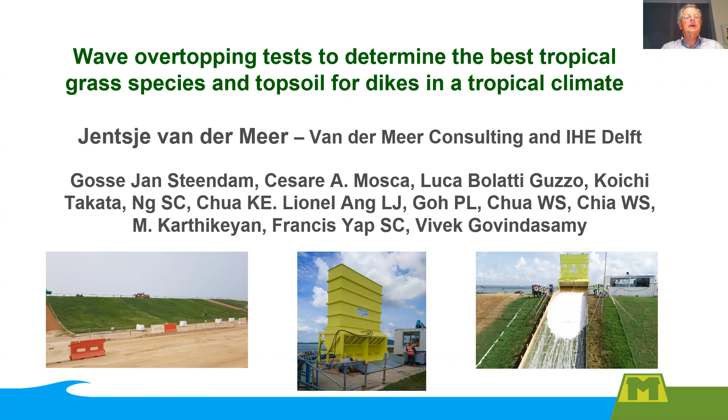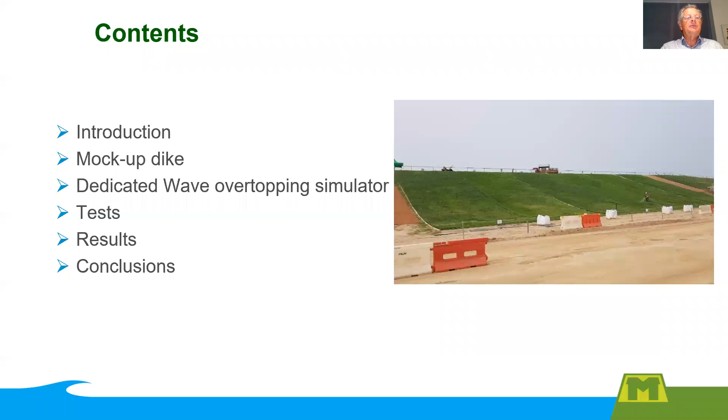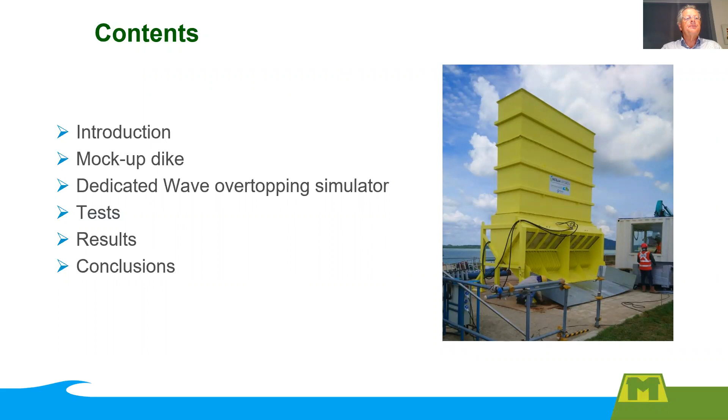I will first introduce the project and why we do the overtopping tests. To carry out the tests, we have made a test dike or mock-up dike. We also designed and constructed a dedicated wave overtopping simulator. I will tell about the tests we did and of course about the results, and finally I will end up with the conclusions.

The project is located in Asia in a tropical area. It is a coastal project where a dike has to protect the area from flooding. The objectives of the project are, firstly, to discover what grass type and topsoil is best as a grass cover on the landward dike slope. From the test results, the best combination will be used in the project for the real dike.

Secondly, we will also test for very large overtopping, really far beyond design conditions, just to see how the grass cover will fail. This is a more scientific aspect, as we don't think those conditions will ever happen in reality. The method to achieve the objectives is quite simple: construct a test dike and a simulator and perform the tests. The realization of this all takes, of course, a significant effort.

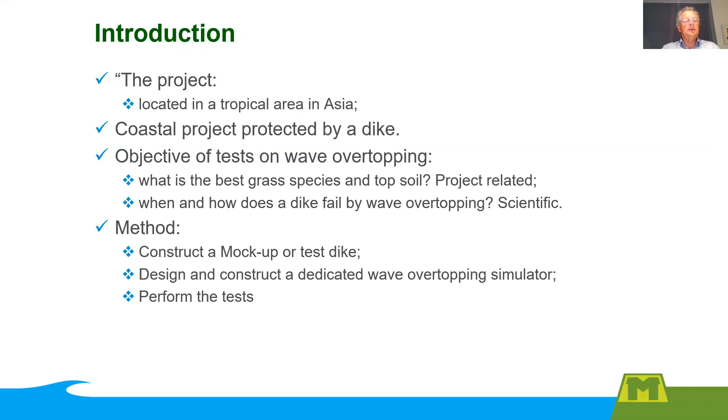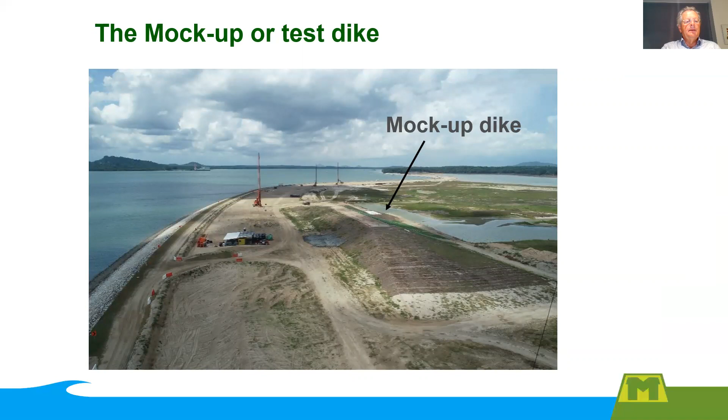Here you see the project site where we have constructed the test dike. The dike will have a landward slope of 1:3 and consists of a sand core covered with 2 layers of clay, a subsoil of 0.4 meters and a topsoil of 0.3 meters, where the grass will be seeded and grow. This landward slope was constructed for the test sections, resulting in a 100 meters long test dike.

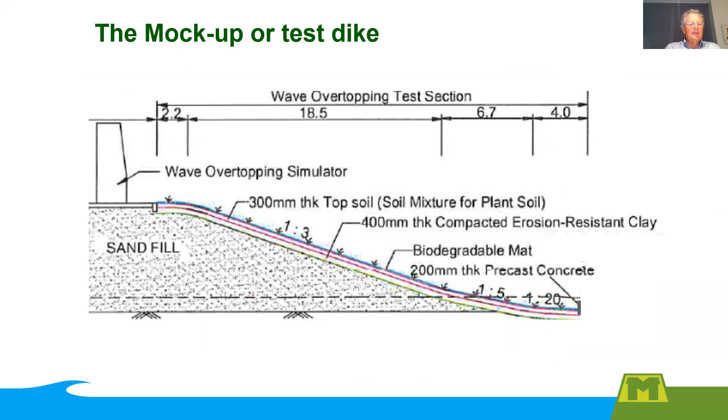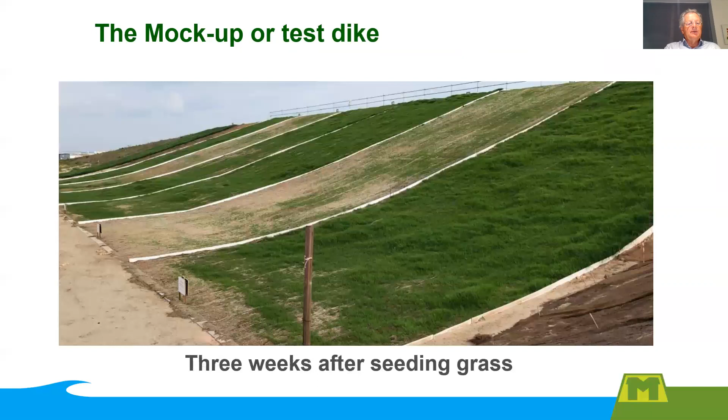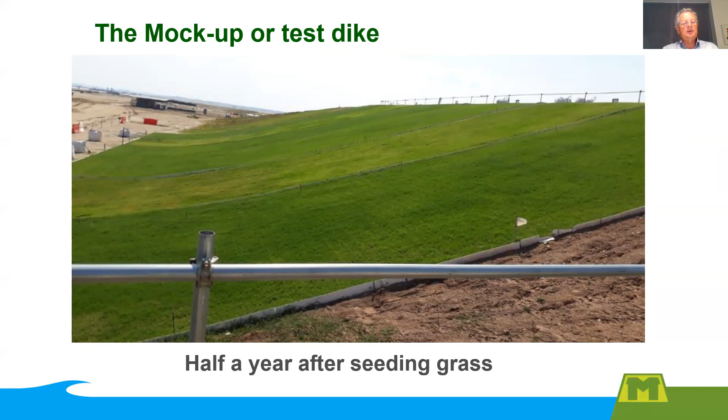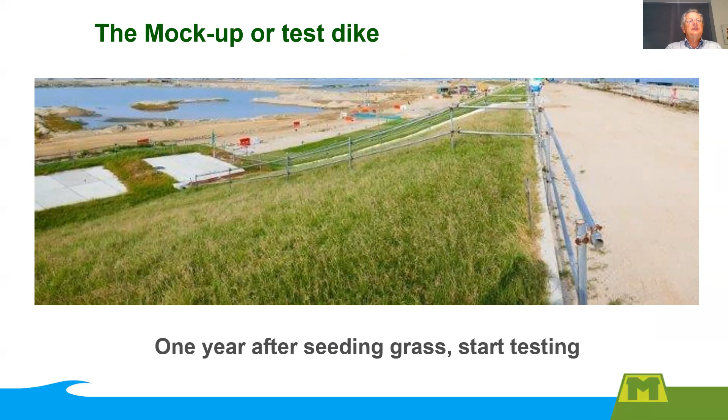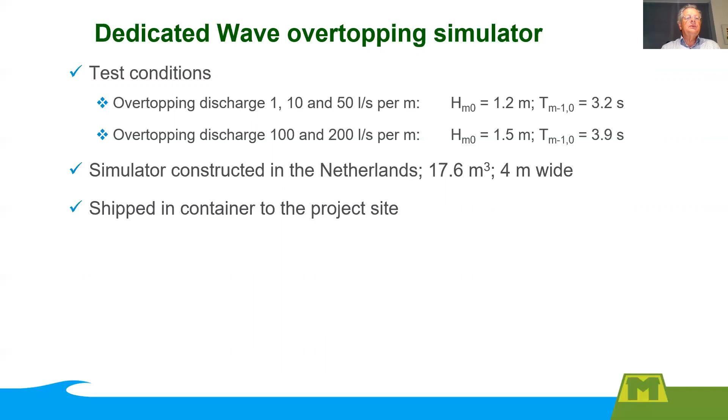In order to be able to test for wave overtopping, we designed and constructed a dedicated wave overtopping simulator, dedicated by improving our existing Dutch simulator and by designing it for the actual wave conditions at site. The real extreme wave heights were expected to be between 1.2 and 1.5 meters. The overtopping discharge to be tested is then related to an assumed water level that gives this discharge. Individual overtopping wave volumes can then be calculated, and these are simulated by the machine.

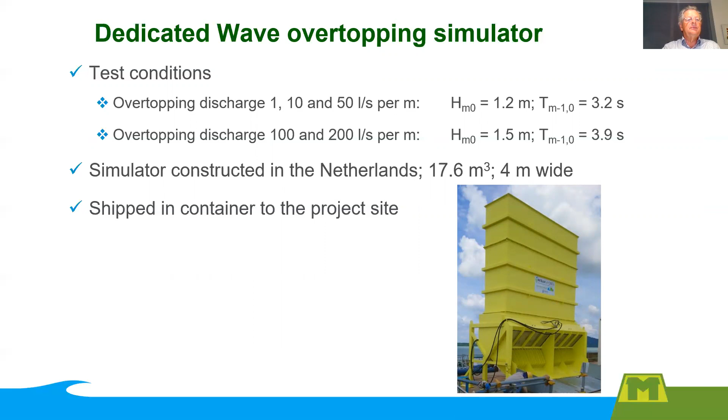The simulator was constructed in the Netherlands and was 4 meters wide with a volume of 4.4 cubic meters per meter width. With this width, the maximum volume in the simulator became 17.6 cubic meters. Then the simulator was placed in parts in a container: first the upper and middle box, and then the lower frame. There was still space for other items to take with us to the project site.

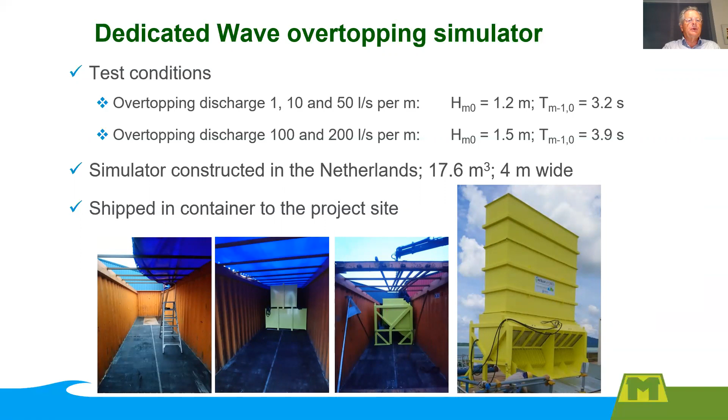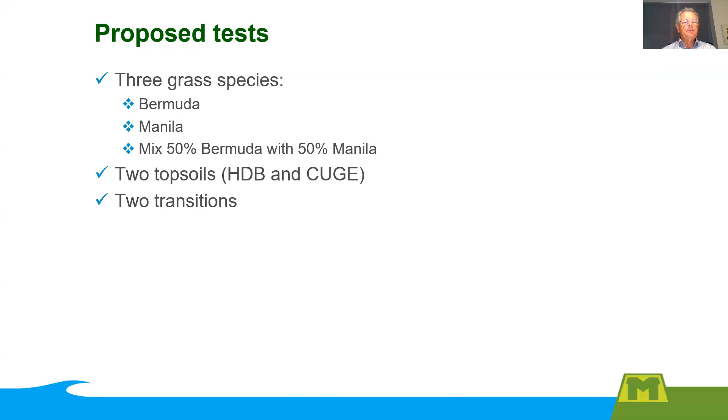The proposed tests are related to questions the client and advisors had. They would like to test 2 specific grass species, Bermuda and Manila grass, and a combination of both, and they would like to investigate 2 different topsoils called HDB and CUGE. This gives in total 6 tests.

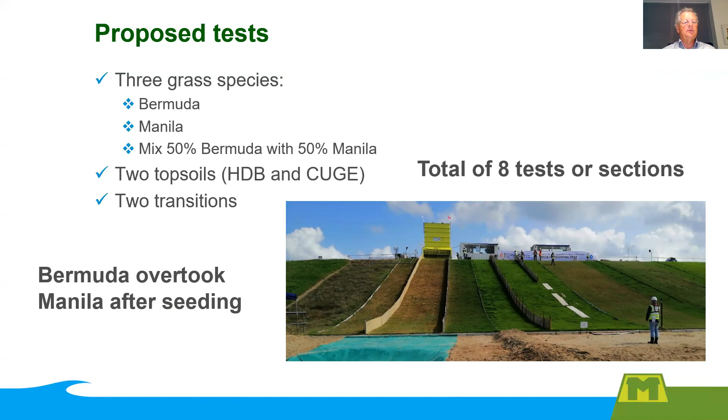Two tests were added on a specific cross-section with transitions in it. What we noticed is that the mixed grasses were fully taken over by Bermuda. It seems that Bermuda develops faster after seeding, without giving the Manila a chance to start growing.

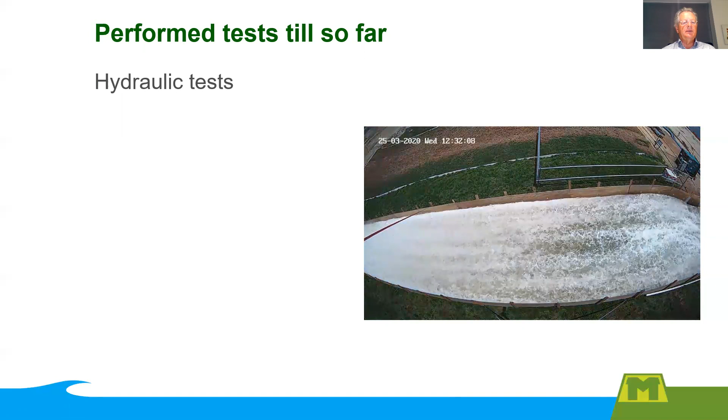In order to be able to say something about the strength of the grass and to relate it to Dutch or northern conditions, it was necessary to measure the front velocity of the overtopping wave volumes. For the time being, this was done by taking a video with a dome camera. Each block on the video is 1 square meter, and by counting the number of frames in the video over 2 meters, it is possible to determine the front velocity over that distance and also over the full slope.

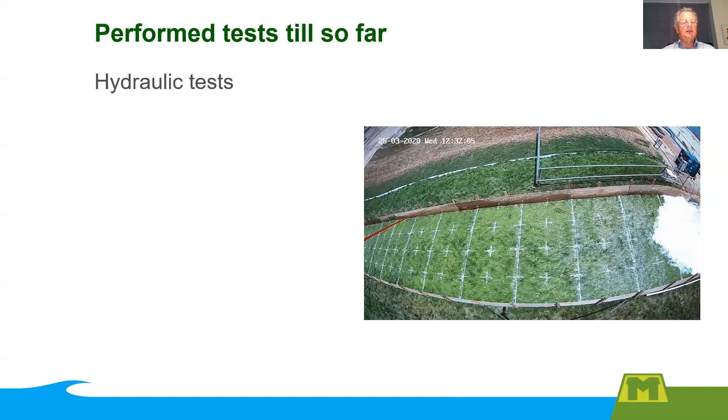Here we see quite a lot of results on front velocity on the vertical axis versus the released overtopping wave volume. The velocity increases with increasing volume. The yellow line gives the velocities at the crest of the original Dutch simulator, and we wanted to have a little larger velocities for the new dedicated one.

The yellow circles show indeed larger velocities, where it must be noted that the two points at the right are not very accurate and probably unreliable. The blue circles give the front velocity 5 meters from the crest, where the water starts to accelerate. The maximum velocity, the green circles, was reached around 9 to 15 meters from the crest, and velocities up to 9 meters were measured here.

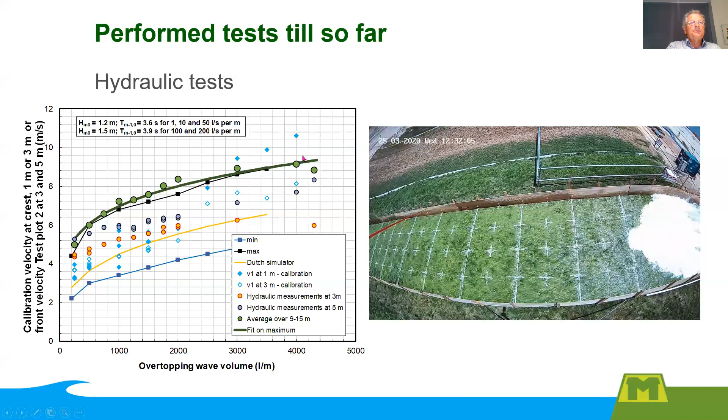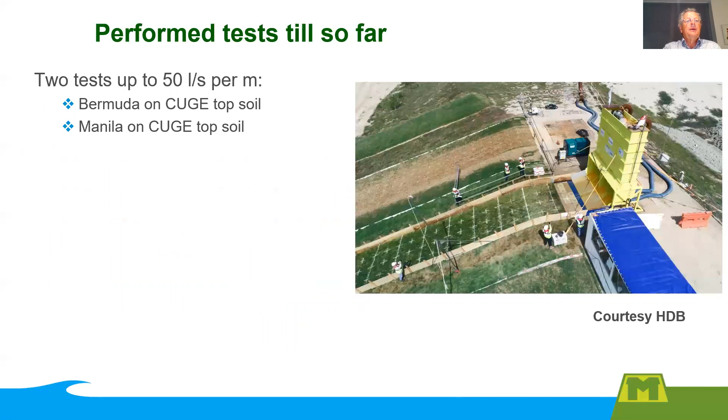As of today, we have performed 2 tests, up to 50 liters per second per meter. Both Bermuda and Manila grass were tested with a CUGE topsoil. We found 2 significant results. Both grass species were strong and showed no damage. But the topsoil showed overall and localized erosion of soil over the whole area.

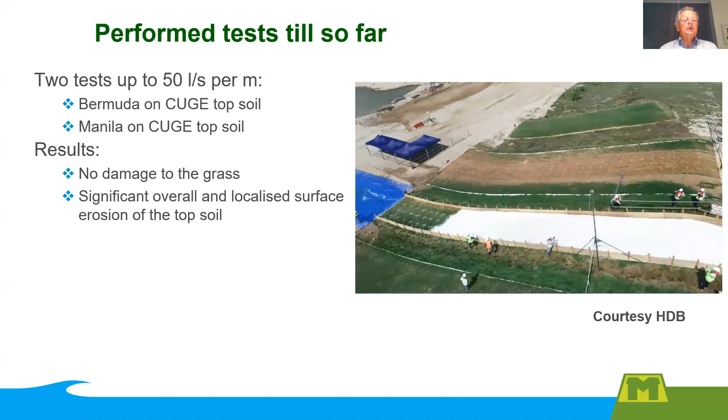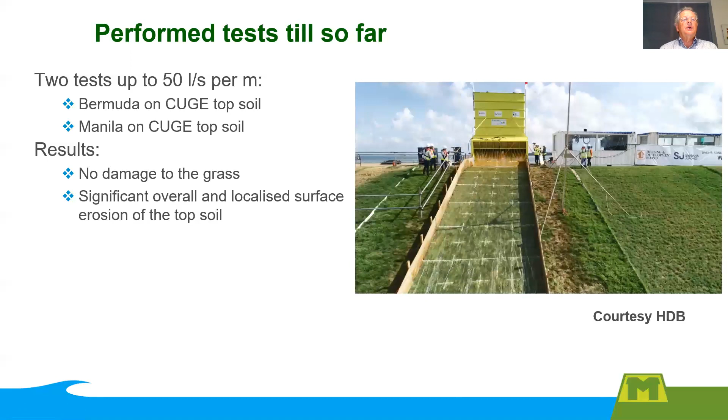This was most pronounced, of course, at the 50 liters per second per meter overtopping, which is at a rate quite far beyond the design requirements. This overall erosion was unexpected, and we had never seen that before in any testing we did.

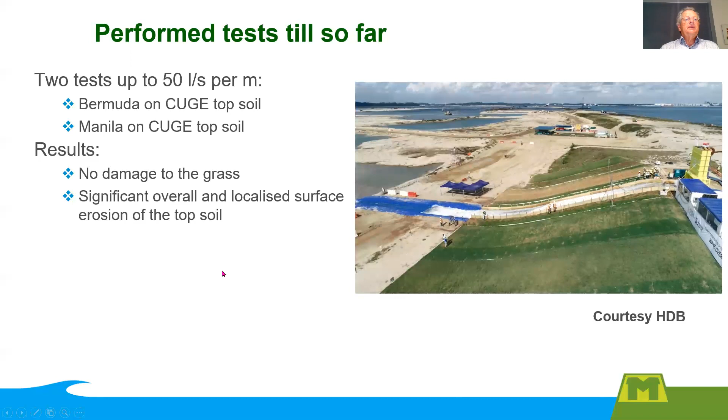Besides overtopping tests, we have also performed grass pull tests, half a year after seeding of the grass, and again, just before the wave overtopping tests. These tests measure the strength of the grass roots, and that is also a measure for the strength of the grass cover. The results showed that there were slightly better results for Bermuda than for Manila. And from the results, it is concluded that the Bermuda grass was preferred and that a CUGE topsoil was not recommended as a grass cover for the dike.

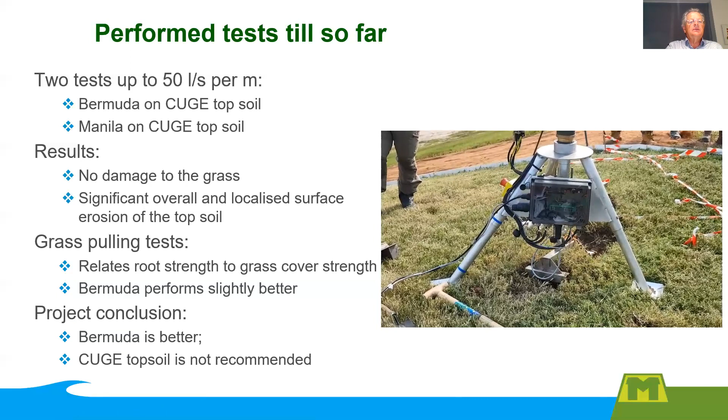From our long-lasting test program in the Netherlands, we know when a certain damage may occur, like initial damage, several open spots, and the most important one, failure of the grass cover.

We found strength parameters Uc for 3 situations. Well-maintained grass on a clay layer with Uc is 8 meters per second. Maintained grass, but with some open spots on a clay layer with Uc is 6 meters per second. And well-maintained grass directly on sand without a clay layer with Uc is 3.5 meters per second.

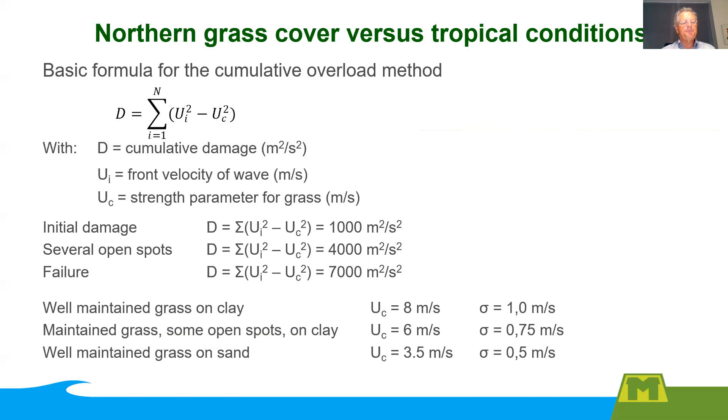The tests with Bermuda and Manila grass on couch topsoil showed for the system as a whole a critical velocity of Uc is 6 meters per second, which is a good value for a grass cover. This is similar to findings from the Netherlands, which reflects maintained grass, but with open spots on a clay layer. The grass itself showed no damage and has a critical velocity of at least 7 meters per second.

Except for the overall erosion of the topsoil, the tropical grass species seem to be more or less equal to the grass species in the northern countries. These are the results we have so far.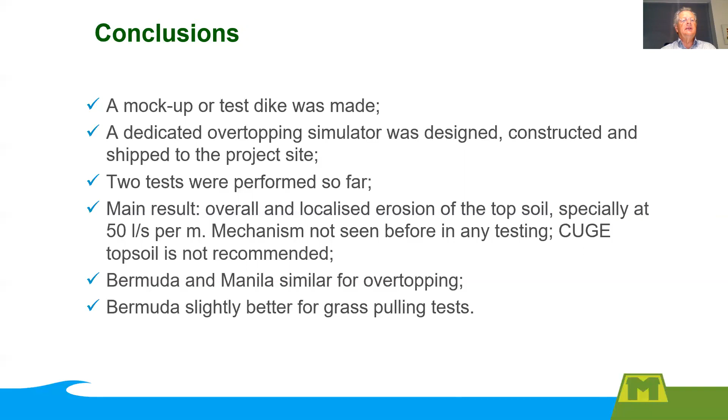Due to better results for the Bermuda grass with the grass pull tests, this grass is preferred for the real dike. And finally, we hope to complete the remaining tests by end of November. Thank you for your attention.